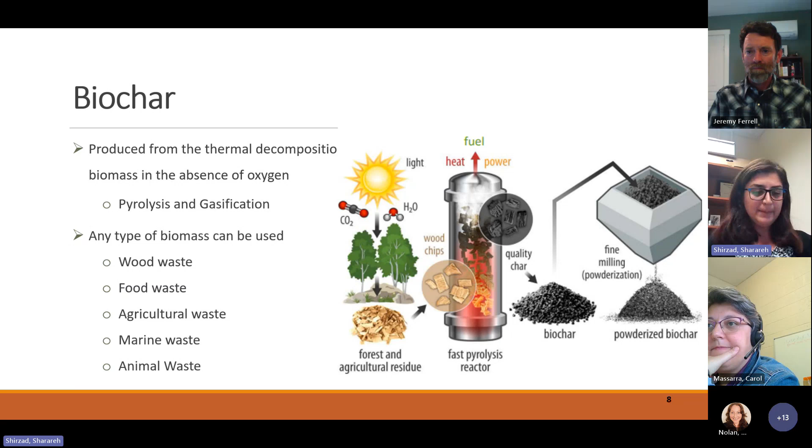The feedstock that can be used for production of biochar includes wood and forestry waste, food waste, agricultural waste, marine waste, or animal waste. And the two main approaches used for this thermochemical decomposition of biomass material are pyrolysis and gasification. So this is basically the process that we go through to produce biochar from different types of biomass.

But here at App State, we are looking into the use of wood and forestry waste for production of biochar, as I mentioned, for use of this material for soil amendment, and another application we are looking into at Appalachian State University is the use of wood-based biochar for production of green concrete with a lower carbon footprint. Why are we working on this project? Well, the main reason is that

every year a huge amount of wood and forestry waste is landfilled. What is wood waste? Waste products of wood include wood residue in a mechanically shredded form. It can be bark, sawdust, chips, hog fuel, slabs, trimmings, different types of products that are produced during the production of different types of wood products.

The number in this slide is just to show you how much material is being landfilled each year. So in 2018, around 12.2 million tons of wood were landfilled, which is around 8.3% of all municipal solid waste landfilled that year. In addition, we also have a huge number of trees removed from private or public areas such as parks, houses, or different areas of the city because of issues such as storms, disease, insects, or development of that area.

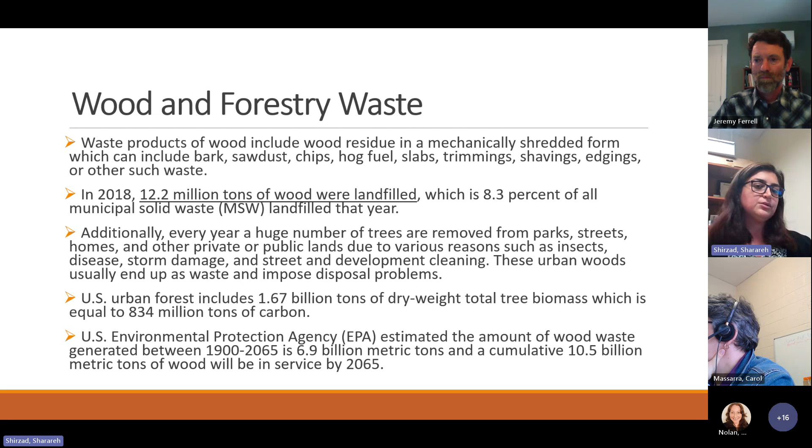Another number in this slide is from the US Environmental Protection Agency, EPA. EPA estimated that the amount of wood waste generated between 1900 and 2065 is around 6.9 billion metric tons, and a cumulative 10.5 billion metric tons of wood will be in service by 2065. So that was just an introduction to go over why it is so important to look at wood and forestry waste as a source of material that can be used to produce biochar for soil application and also as a construction material.

I'll give it back to Jeremy, my colleague, so he can continue this presentation and talk about our Nexus project here and the application of biochar for soil amendments.

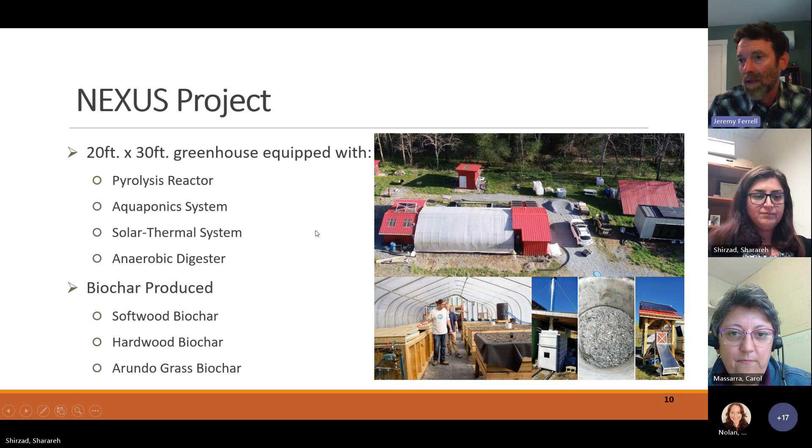Okay, so let's go to the next slide and talk a little bit about the soil amendment. Charcoal is literally just what's left over after you have a fire. When you put it in the soil or use it in agriculture, we call it biochar. Some people call it agrochar. But of course, this is just charcoal. It can continue to be cleaned and upgraded and used for things like water and air filtration.

Okay, next slide. So the biochar crossroads, I'm calling it, is this interesting place where biochar is finding itself in this day and age, at this convergence of a lot of really important areas, including climate, energy, soil enhancement, and waste management. So char, especially when it comes from waste materials, such as materials diverted from the landfill that Sherry just talked about, or underutilized woody materials such as right-of-way utility cuttings that end up getting chipped and piled. They continue to decompose and emit carbon dioxide.

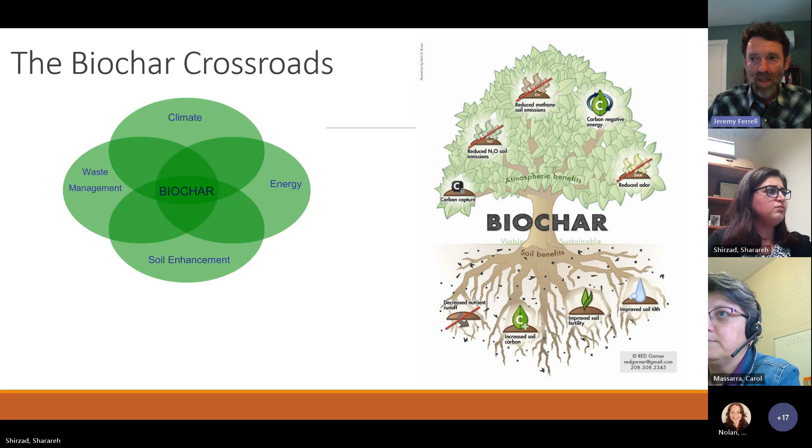From a climate standpoint, biochar can be part of an engineered carbon sink. I think we're all getting to the point now where we recognize that we can't just reduce emissions to reach our goals of 1.5 or 2 degrees Celsius. We actually need to start removing carbon dioxide from our atmosphere. And so biochar is considered an engineered carbon sink, using the soil as a sink.

Okay, so when we make biochar in this way, and I'll talk a little bit about the techniques, the literature estimates that about half of that charcoal is recalcitrant. That means that it stays in the soil from several decades to 2,000 years. There's a lot of research happening around this, but we have archaeological evidence that char from places like the Amazon and Mesoamerica has been around for over 1,000 years. And so what this really means is that biochar can sequester carbon.

And when you think about agriculture in the United States, we know that we have a vast amount of topsoil that's been lost. We have hypoxia areas in the Gulf of Mexico. We have extreme runoff. So biochar is also considered a way to rapidly regenerate soils. So that kind of speaks to the soil enhancement. And in the tree over there, we see the reduction of nitrous oxide and methane soil emissions that can happen, especially with excessive fertilizer use. And we see the improved soil fertility and soil health.

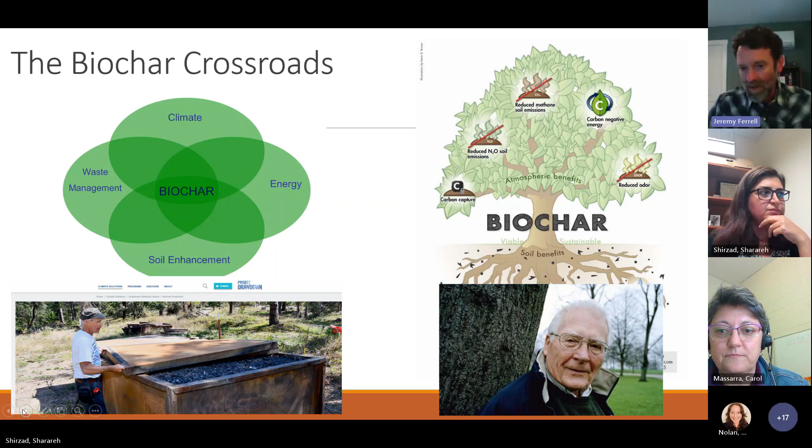And toward the end of his life, James Lovelock was pretty pessimistic on the odds of what our planet would look like. But he did say that one way that we could save ourselves is through the massive burial of charcoal or carbon in the form of biochar, where farmers turn agricultural waste into charcoal and bury it. So this was from New Scientist magazine a few years back. Anyway, so I just wanted to put that in there as a little background on this.

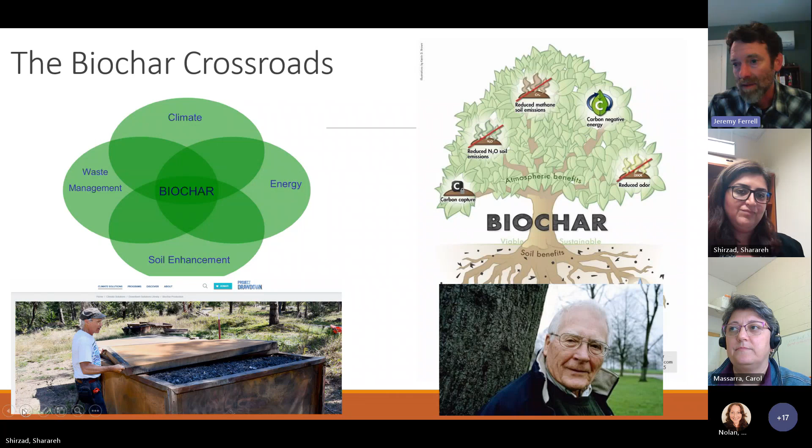This biochar also has a high cation exchange capacity, which is really important for holding on to nutrients like phosphates and nitrates, where plants will then in turn use the sugars that they produce through photosynthesis and through microbial interfacing. They'll free up these cations in exchange for some glucose and some sugar, and the plant will be able to uptake those nutrients. And so high CEC materials, clays have high CEC, so do organics, and so does biochar, allow for increased storage of nutrients and retention of those nutrients.

And then thirdly, as I just mentioned, all this surface area, you can think about all these micropores, macropores. They provide the habitat for the soil microbiome. And we continue to learn more and more about this amazing soil microbiome that facilitates nutrient transfer and uptake for plants. And so what does this all mean?

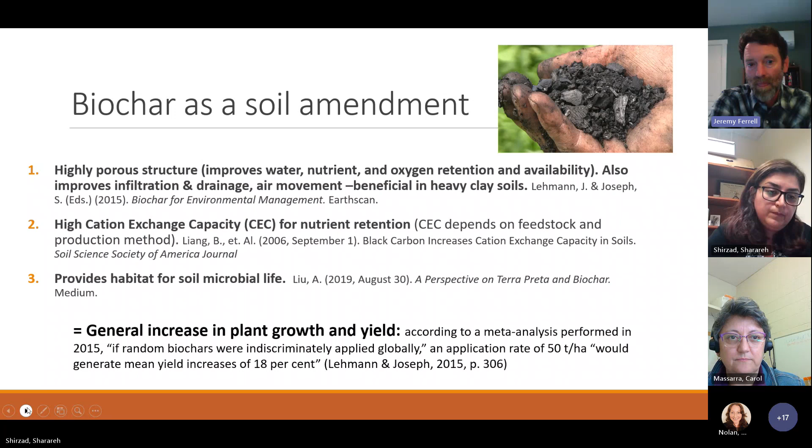Okay, so I'm going to talk a little bit about ways to make biochar, and these are really simple, low-cost ways that we have been working with. We've been working with biochar for a few years and have really settled on what's simple and low cost. As Sherry mentioned earlier, with gasification, you have gaseous products like syngas, like methane, fuels. There's also an oil fraction called pyrolysis oil, lots of different uses for these. But for making biochar and getting it out into the farming community, which is what we've been doing the last couple of years, we have used some relatively simple ways.

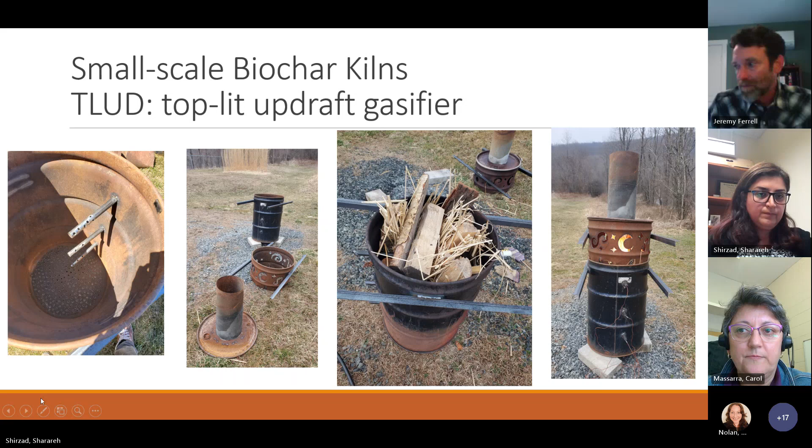And one of the main ideas driving the Forest Service adoption of biochar production was to reduce the debris and the wood litter in the western United States where fire has been suppressed. And now when they do have fires, they have very intense high temperature fires that are quite devastating. And so some of the goal here was to actually reduce that wood load, make biochar in situ, leave it there. And so we built a few of these, and we have started this biochar kiln loaner program, and we have a couple of these kilns out in some of the farm communities around Boone area.

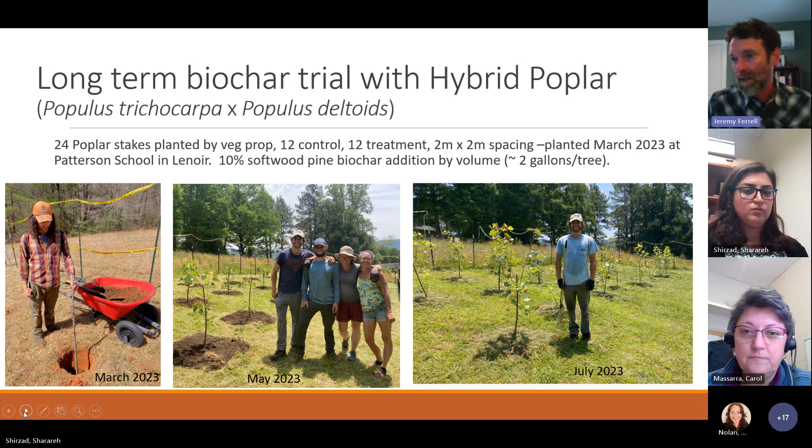And then another thing that I think is really important to know about biochar is that biochar applied directly to the rooting zone of a plant, straight from its production, without any kind of treatment, will actually have a negative effect on that plant. So why is that? Well, because that dry char that has just been pyrolyzed is trying to absorb cations, so those would be nutrients, and it's also trying to absorb water.

So raw biochar straight out of production should not ever be applied directly into a garden or an agricultural field. It should be treated and/or inoculated or charged. There's a couple different ways to describe that. So the idea of charging this biochar with nutrients is really important. And how long does it take to do that? What are some different techniques?

So we have another plant growing experiment. This is more with annuals, not a perennial crop like the trees, where we are using an intentional subsoil. So this is fill dirt; we did a soil analysis on it, 0.09% humic material. So almost zero organic material. Organic material would do this job otherwise. Two of these plots are amended with biochar at a 10 to 20 metric tons per hectare rate, and then they were charged with effluent from an anaerobic digester. So this is one of the other waste to energy and waste recycling projects that we're looking at.

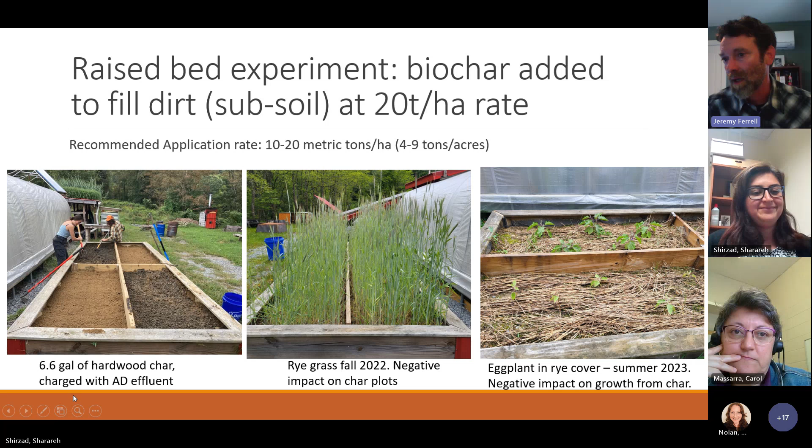Okay, so I think I'm going to stop there, Sherry, and pass it back over to you to talk about biochar in concrete. Thank you, Jeremy.

As Jeremy said, one of the main applications of biochar is for soil amendment. But during the past 3 years, the application of biochar as a construction material has gained a lot of attention. One main reason is that the construction industry is the main contributor to total greenhouse gas emission, and concrete construction has a major role in the total greenhouse gas emission of the construction industry. Concrete is the most used construction material; after water, it is actually the second most used material in the world. And the annual concrete production crossed over 25 billion tons.

So concrete is a commonly used construction material. You see it in infrastructure, residential, commercial building construction, parking, roads, different areas. The production process is simple. Concrete is produced by mixing cement with aggregates and water and sometimes additives. But here you can see the contribution of concrete to total greenhouse gas emission. Concrete is responsible for 8% of greenhouse gas emission. And that emission is coming from the materials that we use, cement and aggregate, the mixing process of ingredients together, transportation and placement of concrete.

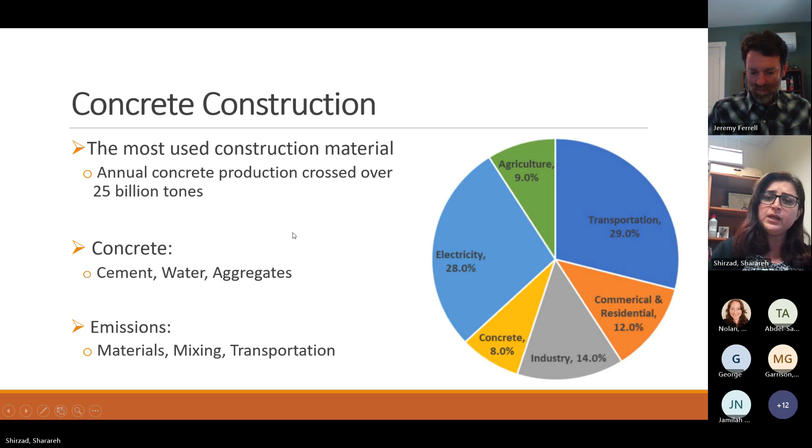So we are looking at the emission of concrete as a construction material, right? The emission of concrete is coming mostly from the mixing process and the materials that are used for the production of concrete. The mixing process has very low emission. Compared to the mixing process, the emission of extraction of materials and the materials that we are using in the production process is very high. So comparing mixing process and materials, we can see that materials have a significant effect.

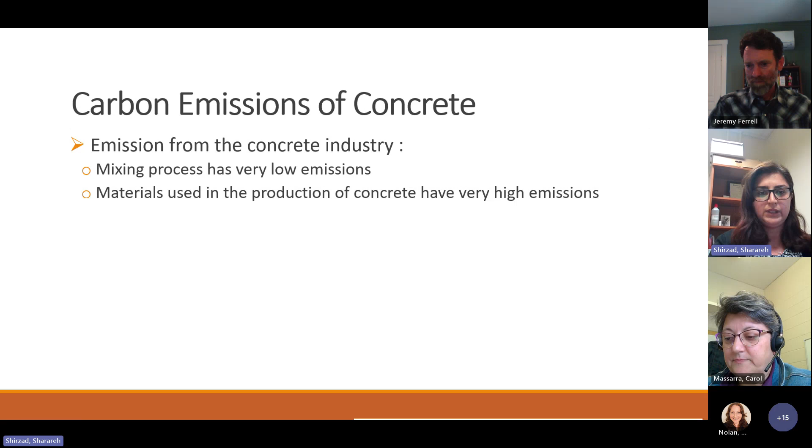The majority of greenhouse gas emission in concrete construction is coming from the materials that we use. And as I mentioned in the previous slides, the three materials that are used in the production of concrete are cement, water, and aggregates. Again, between these three materials, cement is the one that is mostly responsible for greenhouse gas emission of concrete construction and the concrete industry.

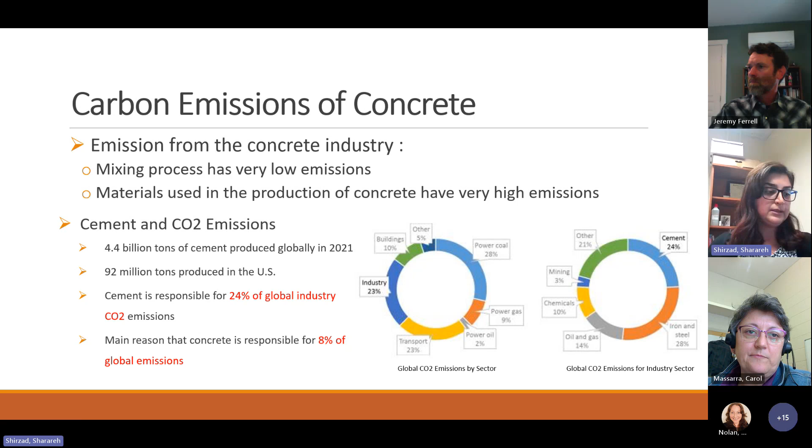4.4 billion tons of cement was produced in 2021, 92 million tons in the US only. And because of that huge number, cement is responsible for 24% of global industry's CO2 emissions. And it's basically the main reason that concrete is responsible for 8% of global emissions. So that's why we need to look into different techniques that can be used to reduce greenhouse gas emission or carbon footprint of the concrete industry. That's why we are looking at using biochar to reduce carbon footprint of concrete.

Okay, so I mentioned that the main reason for greenhouse gas emission of concrete is coming from cement. Now let's look at the production process of cement to see where the CO2 emission comes from, to figure out a way to address that and reduce CO2 emission or greenhouse gas emission of concrete construction. The production process of cement includes mixing limestone, clay, and other materials together in a kiln and exposing those materials to very high temperature, more than 1400 degrees centigrade.

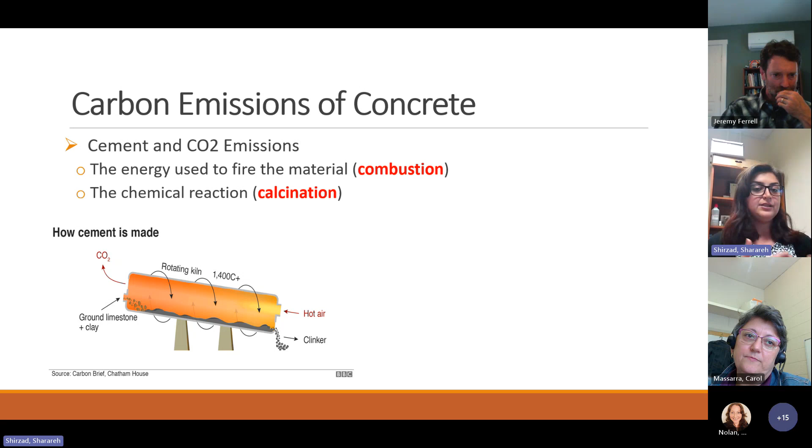Okay, so we have the emissions from the high temperature that is used for the production of cement. That is called combustion, the emission from the energy used to fire the material. And then when we mix limestone and clay, there is a chemical reaction, and during that chemical reaction, CO2 is released. So that is another step in the cement production process, which is referred to as calcination, which results in production of CO2. And this is basically why we say that cement is the major contributor to the emissions of concrete, the 8% contribution of concrete to total greenhouse gas emission.

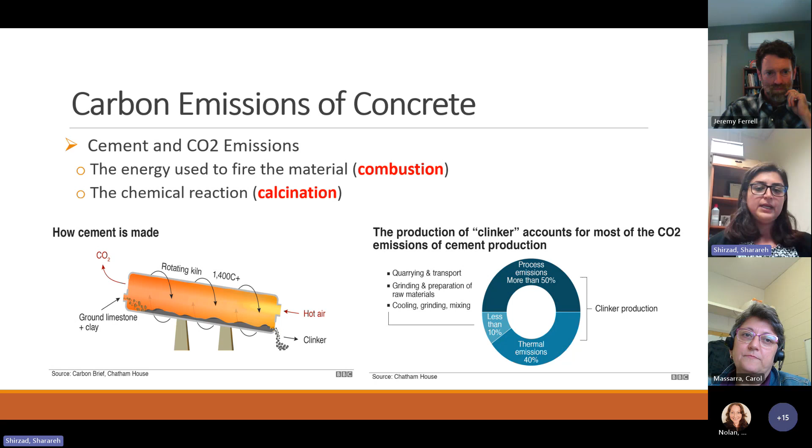So in order to reduce carbon footprint of concrete, we can do different things. There are different techniques that can be used, but one main approach is to reduce or replace cement that is used in concrete with more sustainable materials. So the aim is to completely replace cement, but instead of doing that right now, what we do is partially replace cement with more sustainable material.

A group of materials that are used to partially replace cement in concrete are industrial supplementary cementitious materials. Examples of industrial SCMs are fly ash, which is being used right now as a replacement for Portland cement in the construction of concrete. Another example is ground granulated blast furnace slag. And the third example of an industrial SCM is silica fume. So these are all byproducts of other materials. Instead of producing more cement, we are using waste material to replace cement, and that has a significant effect in reducing carbon footprint of concrete.

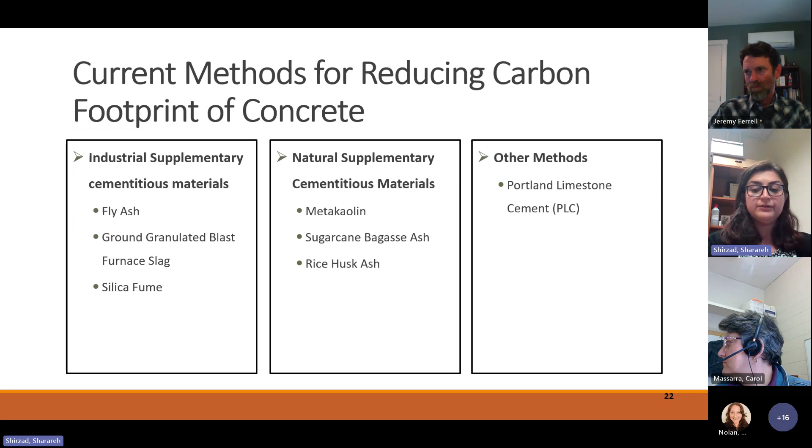Another technique that is being used is PLC, Portland limestone cement. PLC has a higher concentration of limestone, which results in a 10% reduction in CO2 emission of cement. So that's another technique that is being used right now to reduce carbon footprint of concrete. But as I said, in the project that we have right now at Appalachian State University, we are looking at using biochar as a supplementary cementitious material.

As Jeremy said earlier, biochar has a high content of carbon and it's a porous material. So an advantage for concrete application is that it can contain water and it can help with internal curing of concrete. But biochar has a very complex structure, and the structure of biochar depends on the type of feedstock that we use and the pyrolysis conditions that are used for the production of that biochar.

Biochar is a material with high density carbon storage possibilities. And as, again, Jeremy mentioned earlier, it sequesters a high volume of stable carbon in its structure. So we can use it to replace cement in the construction of concrete, and by that, we can help with reducing the carbon footprint of concrete.

But the important thing is that we need to look at properties of concrete, biochar concrete. It helps with the environmental impact of concrete, but at the same time, we need to make sure that we are not affecting mechanical and physical properties of our concrete.

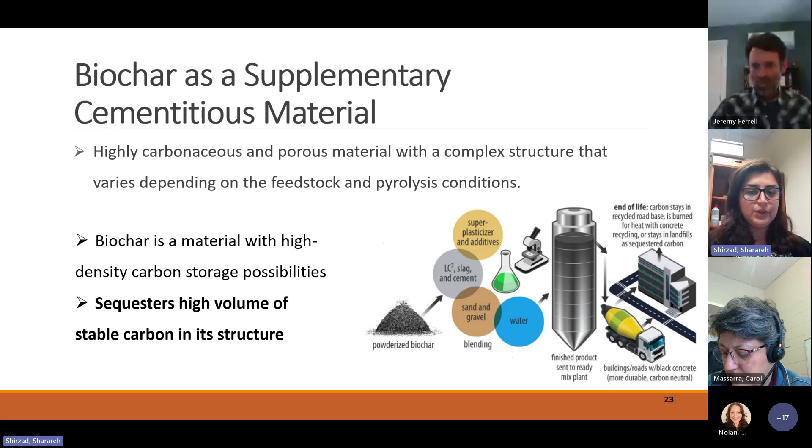So for our project at Appalachian State University, we obtained our biochar sample from the Nexus facility. We have samples produced from softwood, hardwood, and arundo grass. This is an example of a sample that we obtained from Nexus facility for our biochar concrete project. We are basically using locally sourced wood and forestry waste in the production of biochar and then use that biochar in our concrete mixture.

So for our project, the first thing that we looked into was physical and mechanical properties of our biochar. We basically characterized properties of our biochar. We looked into physical properties such as particle distribution, size of the particles, density of material, pH of the material. And we also used scanning electron microscopy to have a better understanding of the structure of these three biochar samples that we have.

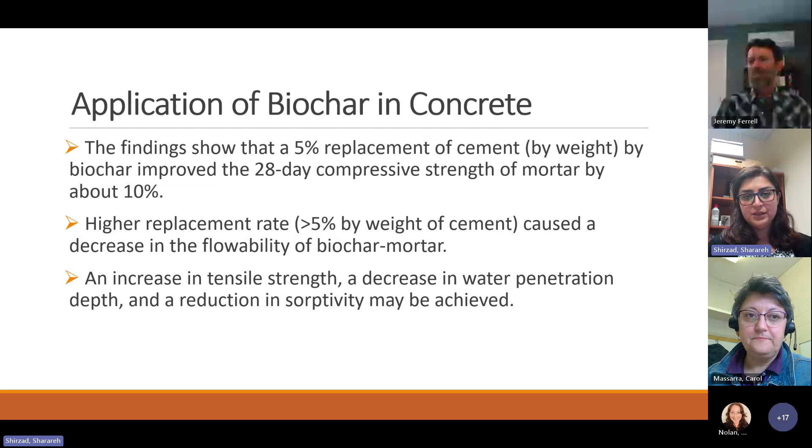So as I mentioned, there is a benefit in replacing cement with biochar, and that is the reduction in carbon footprint of concrete construction. But at the same time, it is very important that we look at the mechanical properties of concrete. Based on the previous studies, we know that 5% is the optimum percentage, which is a low number. So we are looking into ways that we can increase the percentage of cement replacement with biochar.

Based on the previous slide, I mentioned that 5% was the limit, but by looking into different techniques that I have in this slide, we are trying to increase that number from 5% to a higher number to increase the environmental impact of biochar concrete and reduce carbon footprint of concrete. So one thing that we are doing, this is a current project, is the use of biochar in combination with other supplementary cementitious materials. We are working on a project right now that uses biochar in combination with metakaolin and nano calcium carbonate.

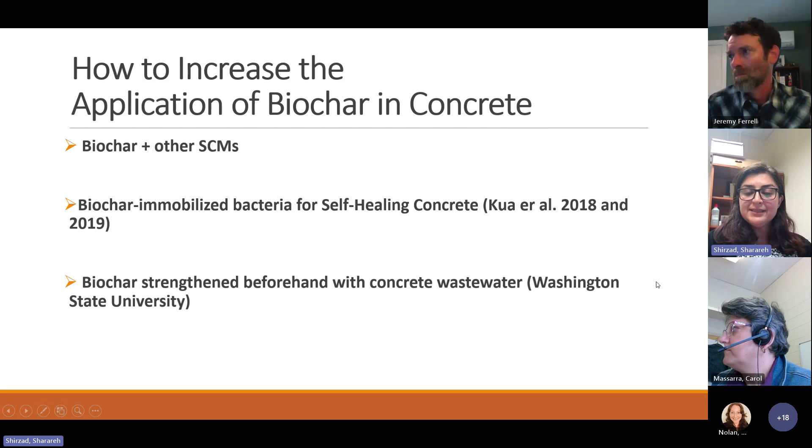So any questions? We have a question in the chat. Do you know of any recent construction where biochar supplements were used in the project, industrial or commercial, or is it still just in trial-like stages? It's still in trial. When we are using these materials for construction applications, we have to go through the process and basically get it certified before we are able to use it as a construction material. So it's mostly still in the research and trial area. I don't know of any actual project that used biochar for construction.

Okay, great. Any other questions? Okay, I have a couple of questions. Have you looked at the cost benefit of using the biochar? For concrete application, that's our next step. After defining an optimum process for the production of biochar in combination with other SCMs, we were looking into doing an LCA and a life cycle cost analysis too, to actually look at the cost benefits of using biochar with or without other SCMs in concrete construction.